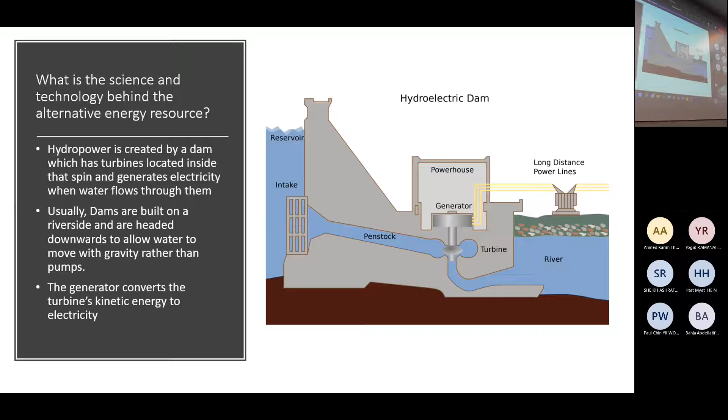Furthermore, in the dam we have a control gate to control how much water enters the penstock, which controls how much electricity is being generated. Also, if you don't already know, hydropower is a renewable energy source because it relies on the water cycle, which is driven by the sun, making it renewable. Next slide.

Types of hydropower plants. You probably thought there was only one type, the impoundment facility, which is the one I talked about earlier, the most common one. But there are 2 more: diversion, which is at the top right, and pump storage, which is here. Next slide.

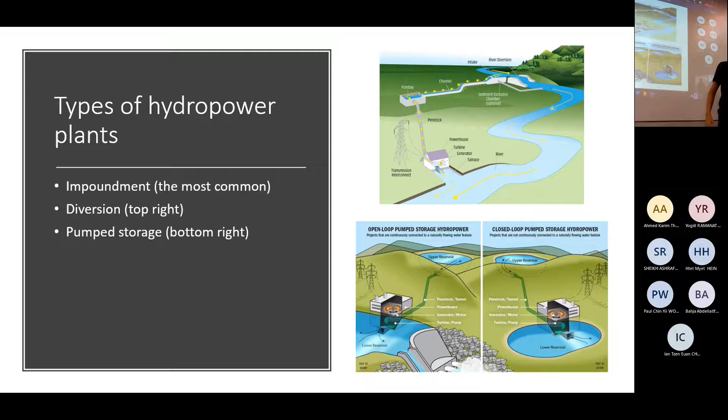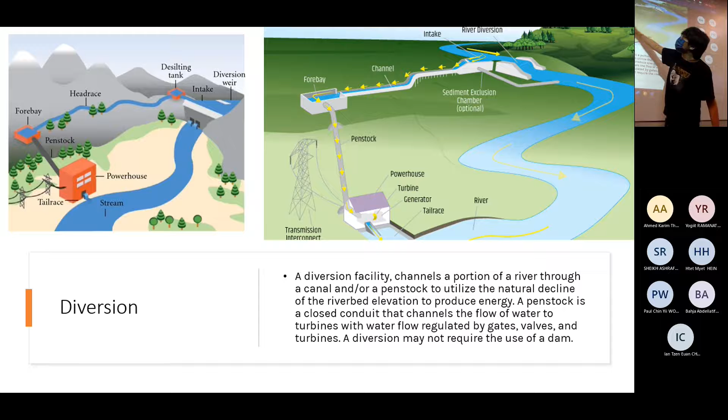So we have the diversion facility for the hydropower plant. This is basically what it looks like. The impoundment facility uses the whole river, but for diversion it only takes a portion of the river, hence the name. A diversion facility channels a portion of the river through a canal or penstock to utilize the natural decline of the riverbed elevation to produce energy. A penstock is a closed conduit that channels the flow of water to turbines, with water flow regulated by gates, valves, and turbines. A diversion may not require the use of a dam, so this one doesn't have a dam, this one has, it's optional. Next slide.

Now we have pump storage hydropower. This one is like a rechargeable battery, right? So when the electricity demand is low, meaning there's more than enough electricity for everyone in town, it pumps up the water to the upper reservoir.

So when electricity demand is high, it lets the water back down, spinning the turbine and generating electricity, so everyone gets electricity. There are two types: one where it's from the upper reservoir to the lower reservoir, and another that uses a lake or a river.

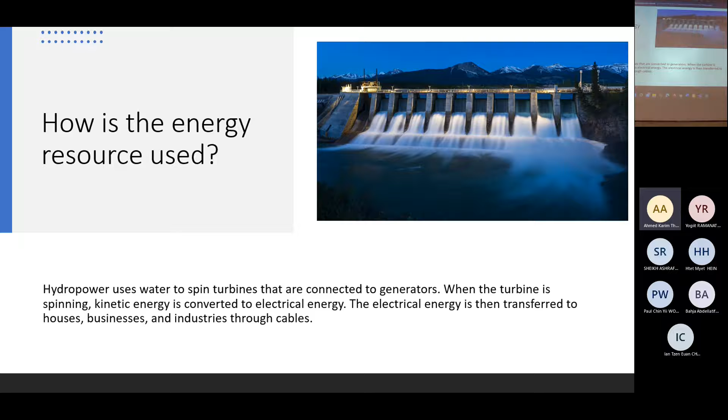Now, how is the energy resource used? The energy resource is used from an upper reservoir that passes down water to a lower reservoir, which applies motion to turbines connected to generators. These turbines create kinetic energy, which is later converted to electrical energy. This electrical energy is then transferred to houses, businesses, and industries through cables.

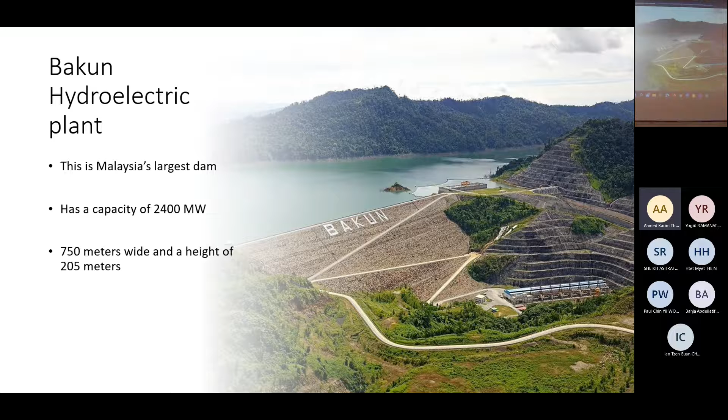In Malaysia, there are several plants, some producing between 40.5 megawatts all the way to 2,400 megawatts. The largest current hydroelectrical plant in Malaysia is Bakun Hydroelectricity Plant, located in Sarawak. It is also the largest dam in Malaysia, with a width of 750 meters and standing at a height of 205. The output of this hydroelectrical plant is 2,400 megawatts.

Now, what are the advantages and disadvantages of hydroelectrical energy? The benefits are that it generates electricity cleanly. Water can also be controlled to avoid flooding and support irrigation, and it could also be used to make clean water. However, on the downside, some people have to migrate and move to other areas. It's also very expensive, there is a limit to some reservoirs, and it is not 100% safe, as animals and fish could get injured or killed in the process.

Now, what is the future like, speaking in terms of Malaysia? Malaysia is looking to plan and build more hydroelectrical dam plants in the future. Currently in Malaysia, there are two dams in construction: the Papar Dam project in East Malaysia, and the Nenggiri Dam in Gua Musang in Western Malaysia.

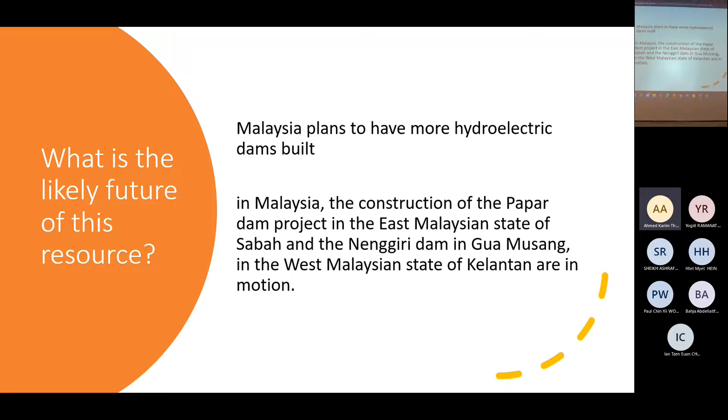What does the community think about this resource? Overall, there's a very mixed response. Some people are in favor of hydroelectrical plants, however some are not. Usually those who are in favor have the interest of electricity and job opportunities. However, those who are opposed and against hydropower plants are usually those who tend to have to move away or relocate due to the construction of a hydropower plant.

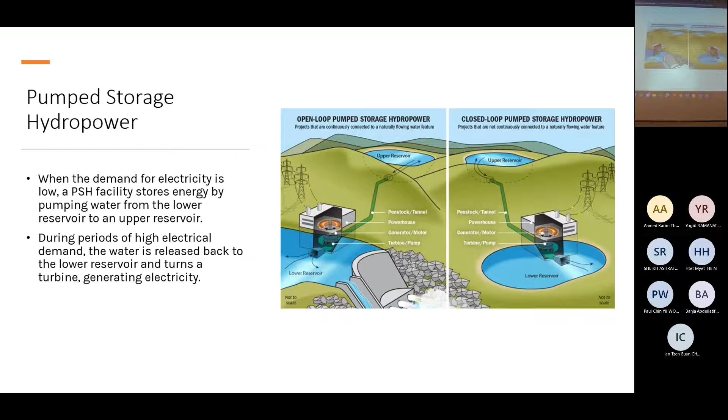Okay good, and then for your—can you go to that slide again? What Adrian was showing. Up, another one before this, I think. Yeah, here. There are two things that you are showing, one is dam, there is no other, and another was no dam. What does it mean?

No, it's just one that has no dam, one has a dam. So if there is no dam, how can you produce electricity? First of all, why do you need a dam? It doesn't need a dam. So how? Okay.

What is the science behind producing electricity from water? How do we produce electricity from water? The water spins a turbine, then the turbine generates electricity. The turbine rotates the generator, and what do you have? Can we just pour the water into the turbine?

It needs force. How do you create that force? Why does it have to be very high? It needs potential energy. That potential energy spins the turbine, creating kinetic energy, which becomes electrical energy. You need potential energy, and if you're talking about potential energy, you have to have a very big potential energy to produce a lot of electricity, right?

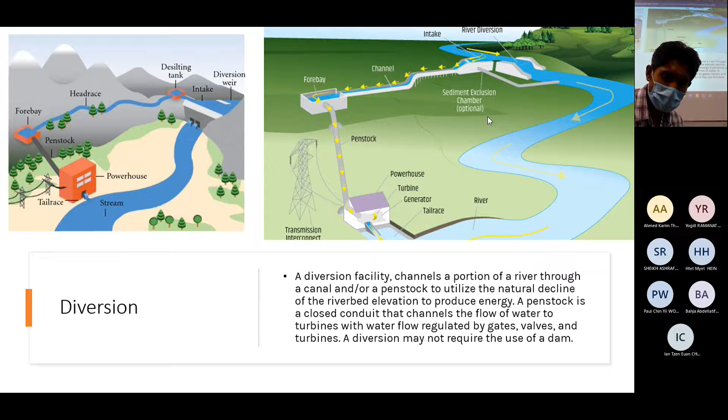Thank you, Tadian. Okay, go and sit. Ahmed, yes, you sir. So you recommended some of the things - can you go to your slide, the problem and recommendation part? Go down, scroll down please, more, more, yeah there. Yes, so benefits and problems. The benefit is generating electricity cleanly.

What do you mean by cleanly? Without causing any harmful substances. What are the harmful substances that can be considered? Harmful substances that could be considered would be dangerous gases such as nitrogen oxide that would be generated by fossil fuels in comparison. Any other gases would be considered dangerous, like methane or carbon monoxide, carbon dioxide.

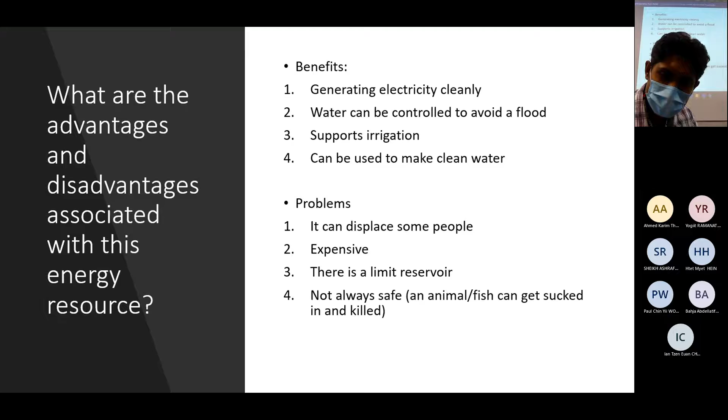Those also would be considered dangerous, sir. So this hydropower, they do not produce those types of gases, is it? Usually no, only in some situations where they use a small generator to redirect water to a different location, such as taking it back up the reservoir, then yes, it would sometimes cause some harmful substances. What is that, taking back the water up onto the dam again? There are some situations where water is retransferred from a lower reservoir to an upper reservoir to avoid flooding, and in that scenario they usually tend to use diesel generators in this process, although sometimes they do use proper electrical generators.

Do you have any example of such activities? Not in the slides, but a while back I did talk to a gentleman who built a dam in Pakistan. He talked about a small dam they're currently constructing that uses such systems to keep things in control. But did you fact check his claim?

Yes, sir. They are working with the authorities of Pakistan. The gentleman is currently retired, but he used to work with the authorities of Pakistan and is still a consultant for hydropower construction there.

How did you fact check that? Because if you want to build a hydroelectric dam, do you know how much water a typical hydropower dam contains? A very massive amount usually, but the case he spoke of is during construction, because there's a lot of water movement factors during construction.

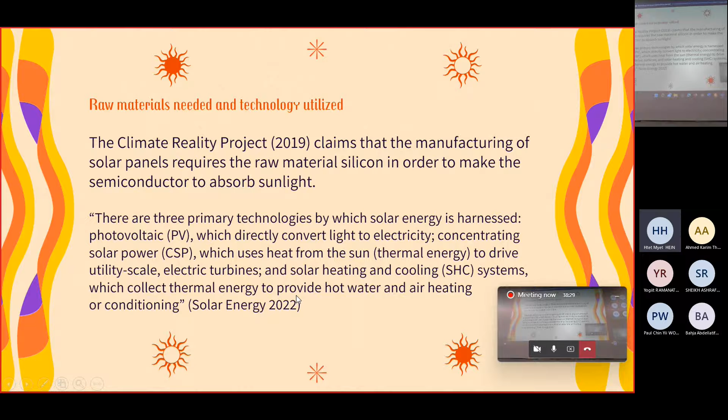PV will directly convert light into electricity. CSP will use the heat from the sun to drive utility scale electric turbines. And SHC will collect thermal energy to provide hot water, heating, and conditioning.

Energy changes occur. The solar panels have two types of semiconductors: the positive type, or P type, and the negative type, or N type. When activated, the electrons will move from the N type to the P type, then a junction is formed.

When sunlight shines on the junction, this will cause a hole due to a photon knocking the electron free. The hole is filled by more electrons, which means free electrons are collected, and they flow through the conductor, so the electrical current is formed.

So is solar energy renewable? Solar energy is in fact renewable, and the US has the most solar energy resources in the world. This is because the sun will always produce light energy.

Malaysia's solar energy profile: Malaysia and ASEAN have been hesitant to deploy solar and other renewable energy production capabilities. Renewable energy only represents 2% of Malaysia's total power producing capacity. Looking ahead, things appear to be brighter, and by 2030, Malaysia's government wants renewables to account for half the country's electricity producing capacity.

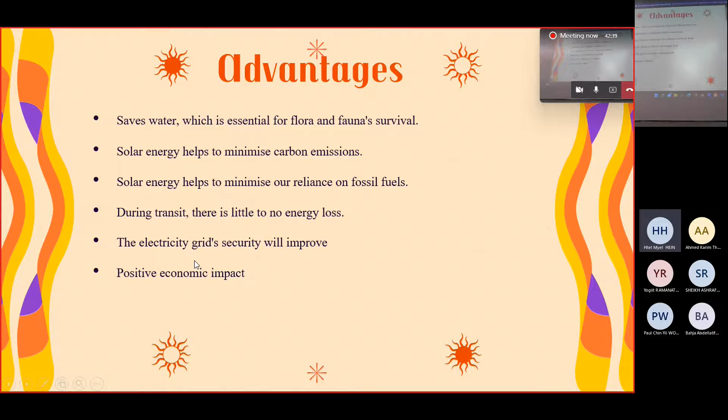The advantages of using solar power: it will save water, which is essential for both flora and fauna survival. Solar energy will help minimize our carbon emission issues. It also helps minimize our reliance on fossil fuel, which will also help us with global warming. During transit, there's little energy loss. Electricity grid security will also be improved, and it will likely have a positive economic impact.

For disadvantages, it is very dependent on sunlight. As we already covered, some countries do not have access to sunlight. There can be toxicity of some solar panels, and it requires large installation areas, and energy storage can be expensive. Finally, the lifespan of solar panels may not be very long.

Global warming and solar power. One of the most pressing issues confronting us today is global warming, and the only method to mitigate the negative consequences of both climate change and global warming is to cut carbon emissions. Solar energy is a great method to cut carbon emissions.

This is because solar power is one of very few sources that does not contribute to global warming and does not emit large amounts of carbon dioxide into the atmosphere or the environment. This is the amount of carbon dioxide emission by energy source.

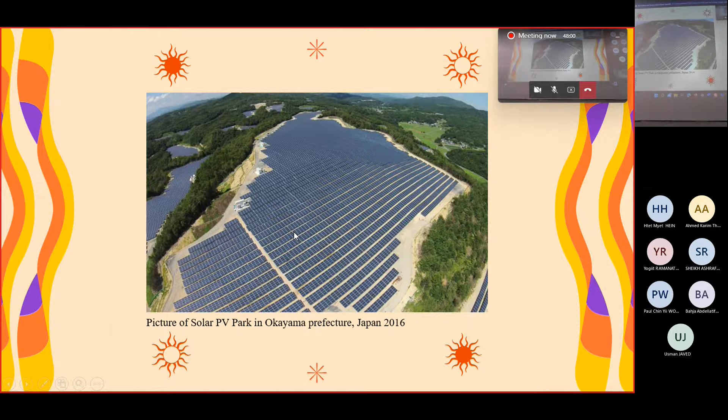Next slide. This is a picture of a solar park in Okayama Prefecture, Japan, 2016. The current largest solar park is in Bhadla, India, which spans 14,000 acres of land. Next slide.

Reasons why Malaysia can't switch to solar power immediately: it is widely known, especially by those who live in Malaysia, that our country is very hot, being close to the equator, and that we have more than enough sun. Taking advantage of this to switch to solar panel power seems obvious, right? But Malaysia's weather is not as suitable for solar energy as we would like. Solar energy works on light intensity, not heat intensity - specifically, the power from the sun that knocks electrons into a current we can harness. The weather in neighboring countries like Australia, where sunlight is reportedly blinding throughout summer, is much more efficient than the skies of Malaysia. Another issue is the financial state of our government due to... next slide.

Why solar power? Solar power is likely to be the main renewable energy that sustains power for mankind's foreseeable future, for many reasons, one of which is that the sun shall continue to radiate solar energy for the next many millions of years. Solar energy doesn't produce any air pollutants, which could lead to global warming.

We can... next slide. Thank you for your attention.

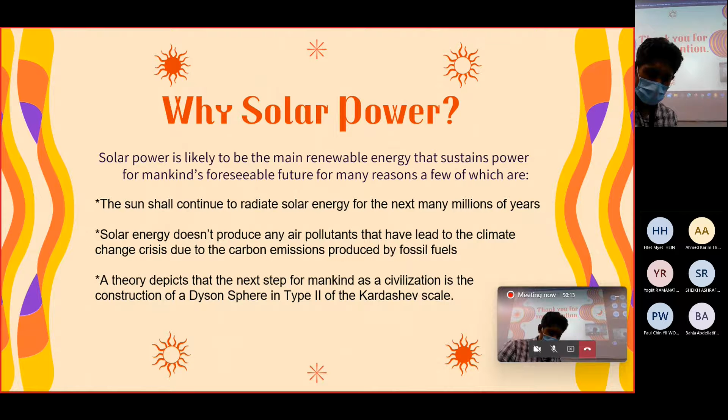Myet, can you scroll up to the slide with advantages and disadvantages? You said here the electricity grid security will improve, there's positive economic impact, and solar helps minimize our reliance on fossil fuel. Yeah, we understand. Saves water - the first one, saves water, which is essential for flora and fauna's survival. How and why?

Can you hear? Hello, Htet Myet Hein? Hello, can you hear? Yes, sir. So what does it mean - saves flora and fauna by saving the water?

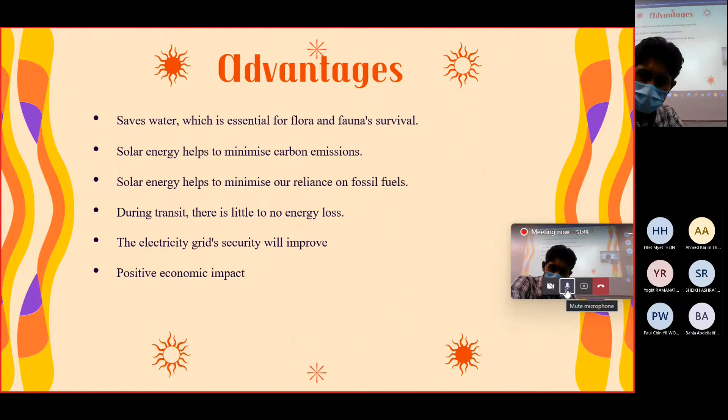I didn't do this. How does it improve grid security? Can you go to the next slide? Depends on sunlight, toxicity of solar panels. What does it mean, toxicity of solar panels, expensive energy storage? What does it mean? I didn't do this part of the slide. You didn't do this part? Yes, sir. Okay, then go.

It's Bahja. Okay, then scroll up please. Go up, scroll up. Yeah, there are two types, positive type and negative type. What are these positive type, negative type? They are semiconductors. Okay, so why is it related here? How is it related here? P type, N type.

Okay, so general question is, did you show any area in Malaysia or Sarawak that would be beneficial from the solar panel? In Malaysia, which area would benefit from using solar panels? It's too cold, then can you turn on... So can you say that again? In which area in Malaysia would you install this system, and why? I will say maybe the rural areas, considering that they usually don't have the energy supplies that we do, and rural areas already have been dependent on sunlight. So I'll say rural areas.

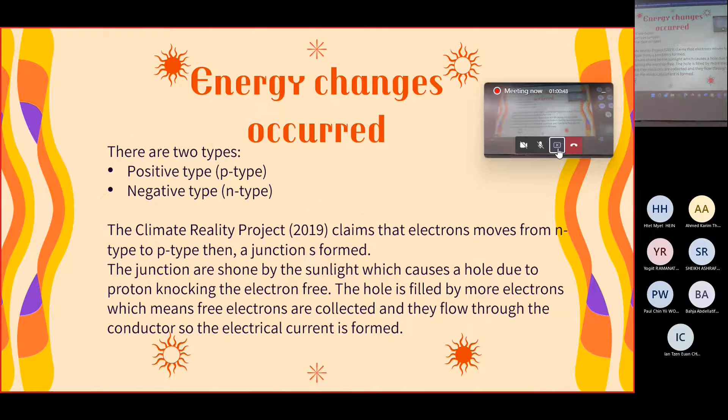What is that, biogas, is it? Sir, it's me, Bahja. What is that? I'm Bahja, sir. Yeah, so where did you go? My mic just stopped, I really apologize. But if I can't redo my part, I can answer the questions. No, not now, but I think I will ask you to present your part later on - I will find a time for that. Okay, no problem, thank you.

Okay, so biomass - yes, continue please.

Are you waiting for Francis? You went to the toilet. Who will go first, you or Francis? You can go first, no problem. Let him come.

Yeah, it's fine, so we go.

How about you share the space first? You share the space, please.

Okay, so biomass. So I start, biomass is going down. After that, there are two, nuclear and wind.

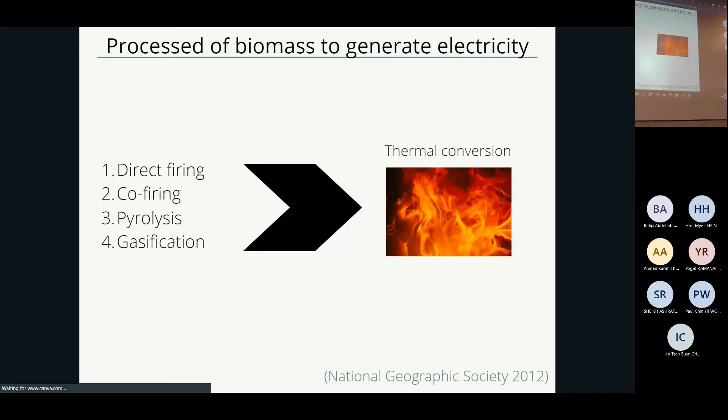Okay. Was it so laggy? Sorry, okay, all right, okay.

So before direct firing and co-firing, there's a chemical process called torrefaction that needs to be carried out, where the biomass is heated to a temperature of 200 to 300 degrees Celsius, turning the biomass into a dry, blackened material.

That material is then compressed into briquettes. As you can see from the image here, this black material is the biomass briquettes, which contain high energy density and are easily burned during direct firing and co-firing.

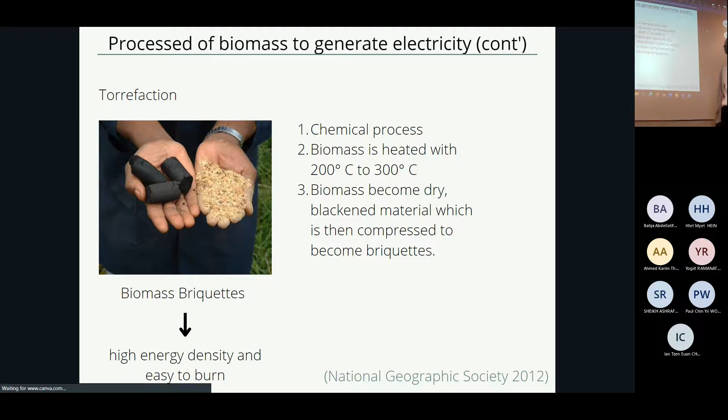In direct firing, we skip this process, and the biomass briquettes are burned in this furnace. The heat produced is absorbed by the boiler on top, which turns the water into steam. The steam is transported to the turbine to turn the turbine in order to generate electricity.

For co-firing, it will be almost the same as direct firing during the electricity generation part. However, the only difference is that both biomass and fossil fuels are burned together, as the biomass only acts as a substitution for a portion of fossil fuels.

As for pyrolysis, this is a process to turn biomass into liquid fuel. During pyrolysis, the biomass is burned at a temperature of 500 degrees Celsius or above.

This turns biomass into pyrolysis oil or biofuel, which can be used as a substitution for fossil fuels or diesel for electricity generation.

Gasification is the process to turn biomass into gas fuel. In gasification, there are 3 important steps. Firstly, gasification itself, which turns biomass into gas, and second, gas purification, which removes impurities such as ash and tar from the gas.

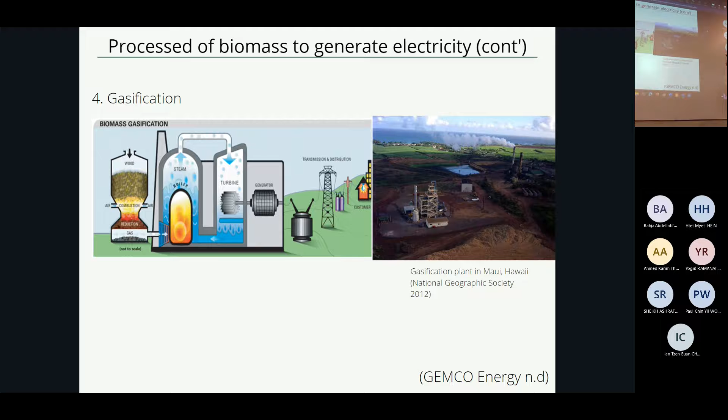Lastly, gas power generation, where the gas fuel is burned to produce heat and turn water into steam, which turns the steam turbine to generate electricity.

All right, no need, this one skip.

So the overall energy transformation would be first chemical energy, which is in the biomass, burned to produce heat energy. The heat energy turns water into steam, and the steam turns the steam turbine, which is considered kinetic energy, and then electricity is produced, which is considered electrical energy.

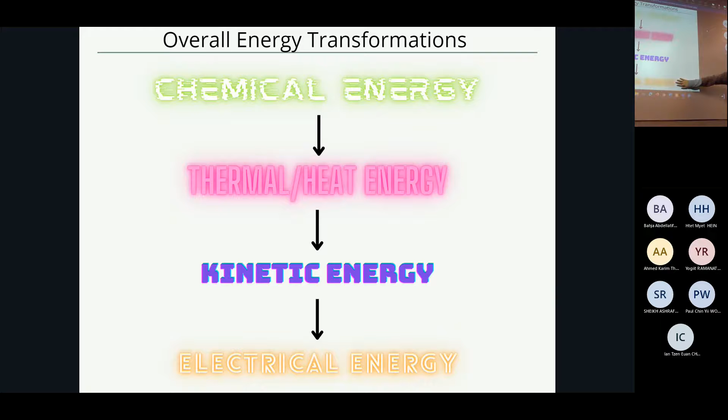Is biomass a renewable or non-renewable energy? Biomass can actually be both renewable or non-renewable, depending on the situation. When the quantity of biomass available is greater than the usage of biomass, it is considered a renewable energy source. However, vice versa.

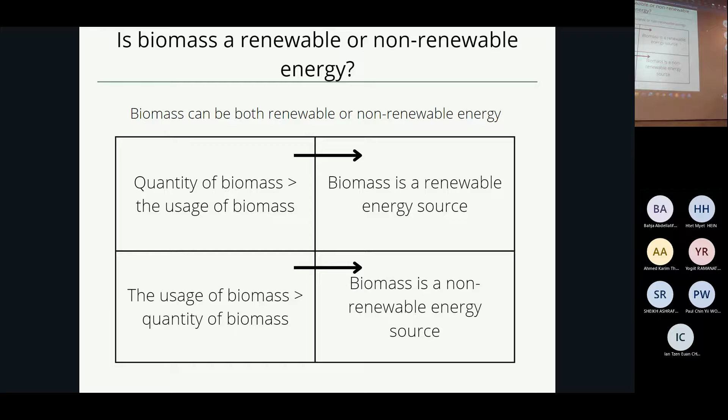All right, that's all of my presentation, and the next one will be Shu.

Hello everyone, so we'll run through the usage within Malaysia. In Malaysia, we have a large resource of biomass as well as wood waste, but this resource hasn't yet been exploited to full capacity.

In 2017, it was reported that Malaysia produced about 702 kilotons of biodiesel. Malaysia is also ranked the 2nd largest producer of palm oil, and palm oil could also be used to produce biomass as an energy source.

According to Erickson, in Zambia, about 70% of the population uses biomass for heating and cooking in households, and because of that, there's a rise in deforestation.

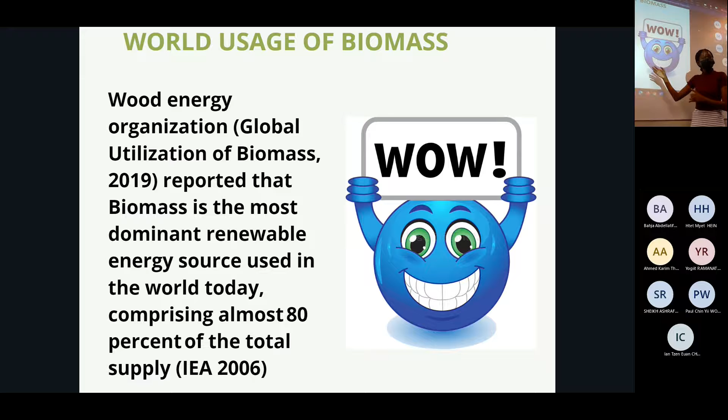So in the world, most usage of biomass is by African countries, with the exception of Haiti, Nepal, Myanmar, and Cambodia. But most of the countries that use this biomass on a day-to-day basis are African countries, with the highest being Ethiopia. In most of these countries, rural areas recorded a higher usage of this biomass in the form of wood.

In Sudan, Haiti, and Nepal, it's also used on a small scale in industries such as sawmills, sugar mills, and tobacco curing.

So some of the reasons why some countries are not using this resource are financial reasons, because they need technology as well as large land for preparation of this biomass, as well as storage and transportation of the biomass.

Environmental laws and regulations that are not favorable to the use of biomass as a renewable resource, and also fines and penalties that are lenient towards the use of fossil fuels.

Belief of politicians or key decision makers that fossil fuels are still a resource that we need to use in the world, and they have not seen the benefits of biomass as a renewable resource of energy.

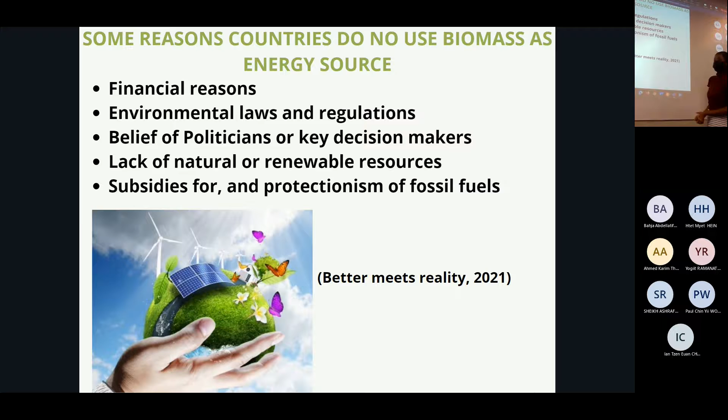Thank you, Shruti. Today I'll be presenting about the benefits and drawbacks of using biomass.

Did you know that biomass energy is actually cleaner than using fossil fuel? This is a point I'll explain later, and because of that it releases less greenhouse gases, also known as GHG, than fossil fuel. Biomass is also cheaper in price than fossil fuel.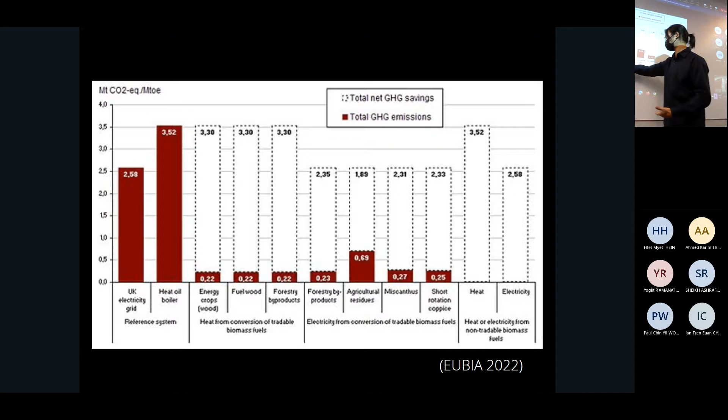This shows the quantity of CO2 gained by burning it, which will mostly be fossil fuel here. This will be gained from biomass, which is done by heat sources, and this would be gained for electricity. This is a comparison.

It's found that if we use biomass, we actually save a total of 3.3 million tons of GHG emissions when converting biomass to heat energy, and an average of 2.5 million tons for electricity generated from biomass.

Another thing about biomass is that it's actually carbon neutral, meaning the carbon dioxide released by biomass is at the same rate as the consumption of carbon dioxide by the plants. Therefore, biomass has the potential to contribute fewer emissions of greenhouse gases to the earth, and therefore doesn't raise temperature as much as fossil fuels.

But even though biomass has a lot of benefits, we also need to consider the health and safety issues with biomass. One thing about biomass is that it produces a lot of methane gas. High exposure to it causes mood swings, trouble speaking, headaches, vomiting, memory loss, and blurred vision.

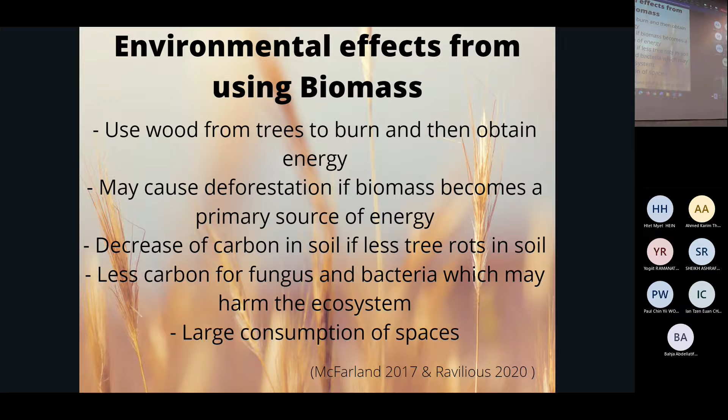It's also important to consider the environmental impact, as biomass actually affects nature through deforestation. Large consumption of wood, which is a major source of biomass, needs to be diversified, and also carbon inside the soil is affected. As much as carbon neutral is a thing, this means carbon dioxide in the air will still be sustained, but not in the soil. Therefore, some species such as fungus and bacteria may go extinct and will eventually harm the ecosystem. Another thing is that it consumes a lot of space for plants, as a foundation for biomass-specific plants.

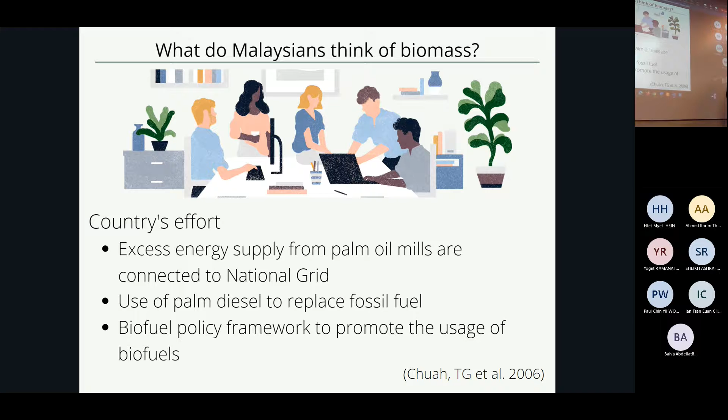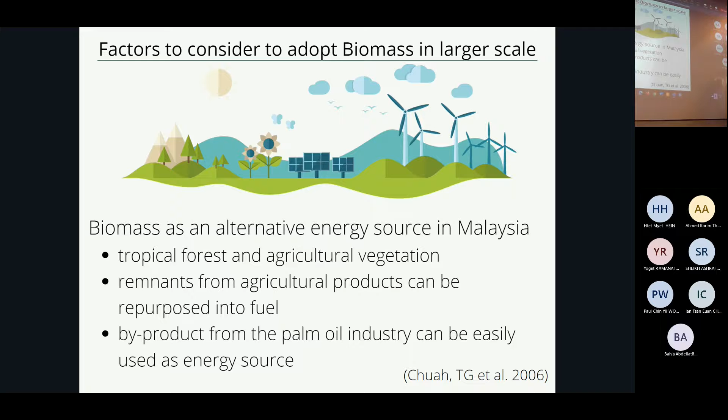Secondly, what are the factors to consider if we were to adopt biomass on a large scale? As Malaysia is still mostly surrounded by tropical rainforest and agricultural vegetation, biomass has the most potential as an alternative energy source in Malaysia. As mentioned before, remnants from agricultural products can be repurposed into fuels. Byproducts from the palm oil industry can be easily used as a renewable energy source. Next, to provide an entire country with consistent power supply, large-scale biomass energy production will be needed. As financial resources are required to develop various projects, many investors are reluctant to invest in bioenergy projects as it is considered an infant industry with a high risk factor.

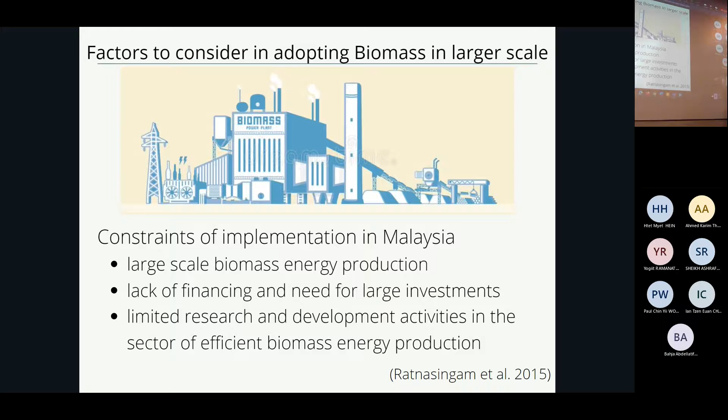Thirdly, let's discuss the factors hindering the implementation of biomass in Malaysia. One of the main things to include is that biomass is not a clean source of energy. As burning of biogas creates air pollution, it can cause asthma, cancer, heart attacks, or even premature deaths to surrounding residents of the area. This is because pollution from burning wood is just as bad as pollution from burning coal. Next, due to the lack of technical courses offered in Malaysia, there is a limitation.

Thank you, it's a good presentation, very energetic. I like this way. I'm so sorry, just- I'm so sorry for that. Do you want to give him a chance to finish his slide? Already a lot of information you have given, because I have another two groups to go, but I have some questions actually.

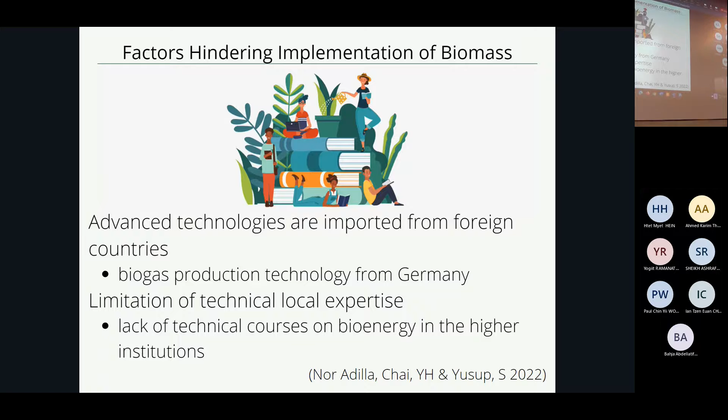As Francis concluded, it's not a clean energy, but although it's not a clean energy, we still can consider it a renewable energy, is it?

Eugene, I think you're talking about the- whatever, sorry, what is that? It's okay, that's why I said that. You tell me, I mean correct me if- no it's okay, mispronounced your name because- yeah. Eugene. Yeah, okay, Eugene, okay.

So why did you say it's not a renewable energy? I did not say it's not a renewable energy. I said it can be both renewable or non-renewable, depending on two situations: one, the quantity of biomass available, and two, the usage of biomass. So when the quantity of biomass available is greater than the usage of biomass, then it can be considered a renewable energy source. But if the quantity of biomass available is lesser than the usage of biomass, then it will be considered a non-renewable energy source.

So it's just your criteria of renewable, non-renewable based on the usage. Yeah, based on the usage and the quantity available. It's like solar energy. So if I have something, biomass, yeah.

Mostly, okay, before that, where do you get the biomass from? Naturally, plants, non-living plants, yeah, underneath the water, soil, right? Underneath- just burn the plants. Sorry, we burn the plants, to burn the plants, yeah, the raw material. The raw material is, usually biomass, we find it from underneath the soil, underground. How do you find the coal? How do you find the coal?

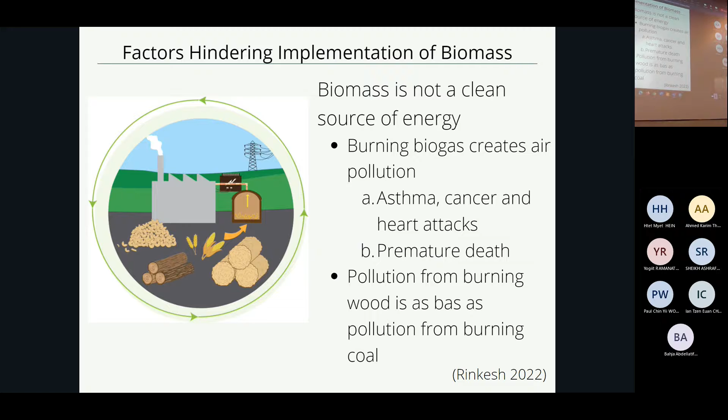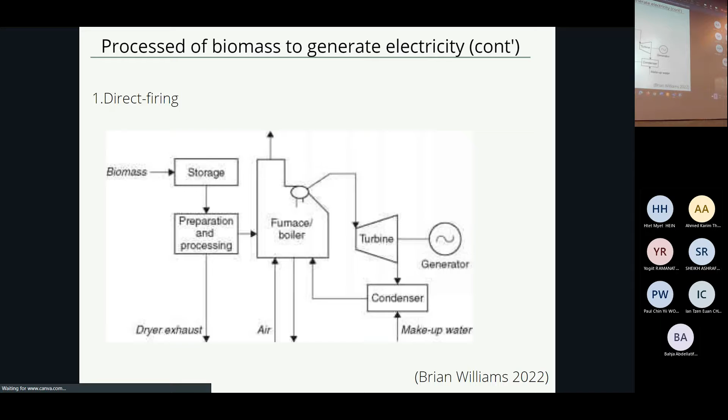Oh, go to this slide. I remember, go to the slide. Go up. Yeah, here, go down. Down, yeah, this one, co-firing. No, coal-fired, pyrolysis or co-firing? So this is the boiler, yeah?

Yeah, your biomass acts as a substitute to a portion of fossil fuel. So we can substitute fossil fuel, but only a portion. Both biomass and fossil fuel, we are getting from the mines, underground. Yeah, one is renewable, another is non-renewable.

I would say coal is not renewable because coal needs a long time to make, like thousands, maybe millions of years. So if we imagine that coal could be replenished in like 2 or 3 minutes, then would you consider coal as non-renewable? It would be renewable in that way, right? That's why I'm saying that.

You're correct, that's why we consider biomass as renewable, because of torrefaction and pyrolysis, we know this technique so we can produce it that way. In that way we can consider it renewable. But if you are just taking it from underneath the ground, it's not renewable, you cannot replenish it that fast.

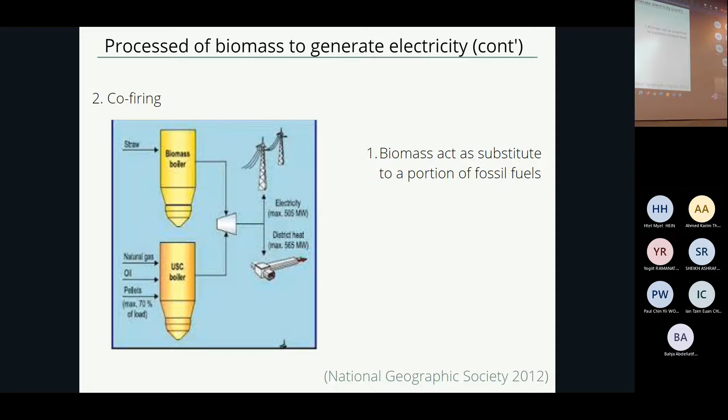That's the good thing. Okay, my question to Ian. You talk about biomass, this and that, good, bad. What is the energy density of biomass? Have you done the research? From 1 kg of biomass, how much energy can you get?

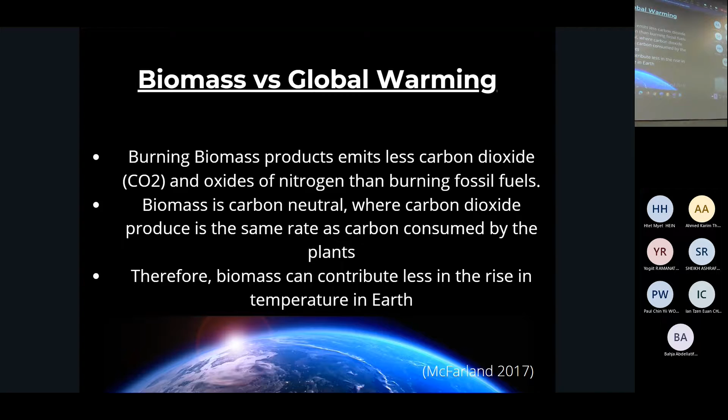Sorry, I did not find the amount of energy. Do you think it is constant? I think it can vary depending on what biomass. Exactly, yes, what biomass, how long, how much stability it has, and how long do you store it, oxidation, many things going on. I didn't ask for that much detail, but I'm putting these questions forward so that later, if you are interested, you can think more about these things.

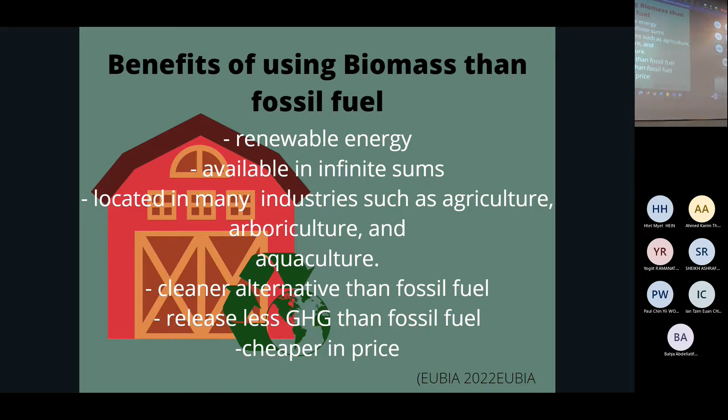Okay, and Francis, you're talking about biomass in Malaysia. How much do you know? Do we know how much biomass we can extract naturally, or currently what is the practice? Currently there isn't much practice because I think...

Can you repeat the question again? What is the current amount of Malaysian usage of biomass? Does Malaysia really use biomass? I believe I read one article, but I didn't cite it here. It says that there are only a few places, it's not majorly dependent on biomass because they are very reluctant to switch from our current energy source to biomass.

Okay, so that means there is almost none, a few, but it's close to none because it's not majorly dependent on biomass to supply energy to our country. Okay.

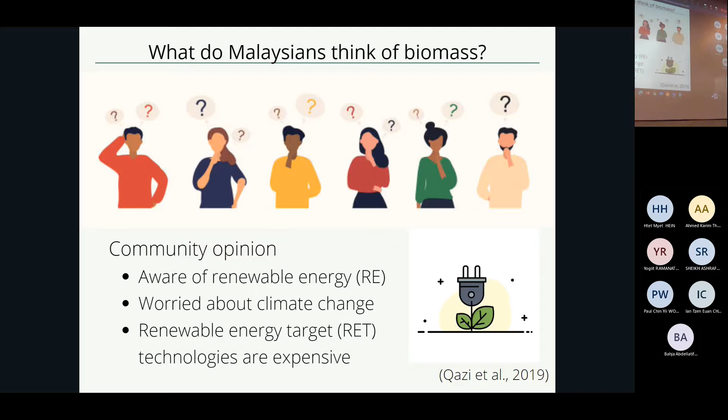You are talking about biomass all over Africa and everywhere. How does this biomass actually help to produce electricity? Our concern was to produce renewable electricity, right? So how does this biomass help to produce it? In most of these countries, we use electricity, but it's used elsewhere.

Okay, in most cases, basically heated in the form of charcoal, that black coal. The black coal is normally heated and used, just as we see in fireplaces. So we get the heat energy from there. Yes, so this heat energy will be converted to electricity.

To electricity to just be used, the heat will be used itself? To use for what? The heat itself will be the one used? And that's it completely? No, no. You are using this biomass in a factory, right? But you need that heat energy at your home. Are you bringing the factory to your home, or bringing the home to your factory? So it's distributed. How?

So once you have the electricity produced... Exactly, that's my point, how do you produce electricity then? So he explained the process in which it was heated. What heated? The plants and biomass. Okay, and then? Yes, they're heated and then converted into thermal energy, and that thermal energy is spilled to turbines. The turbines are connected to grids, which are then distributed.

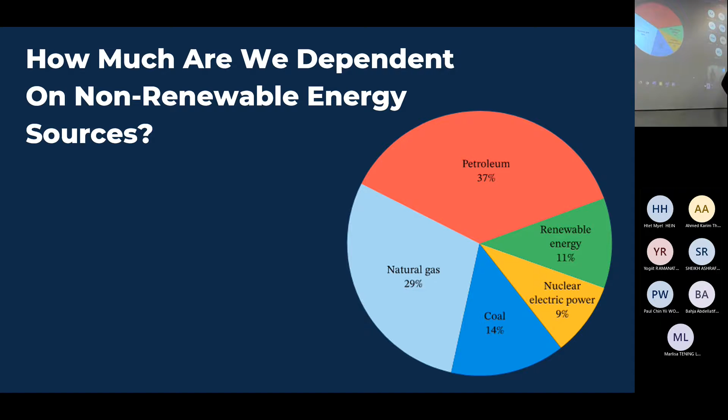Moving to the introduction part, wind is known as the cleanest renewable energy resource ever. So how is this converted to electric energy? We'll discuss that later, but starting with formation: wind currents form due to different atmospheric pressures, flowing from higher to lower pressure areas. These air currents turn the windmills, the propellers rotate, and this generates electricity. But this is not as simple as it seems.

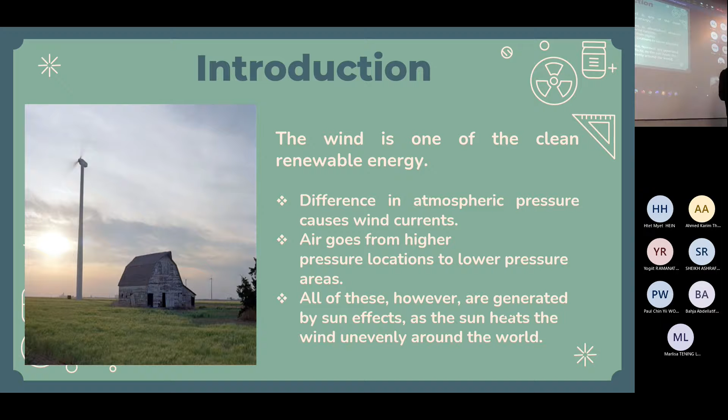This kinetic energy then converts to mechanical energy and then into electrical energy. So we have a transformation of energy from kinetic to mechanical and then to electrical. The sun plays an important role in this - we won't focus on the sun's effects, but we must mention it because it spreads wind currents throughout the earth unevenly. Can we move to the next slide?

Okay, wind energy, this is basically the mechanism. Wind power or wind energy is described as the process by which wind energy is used to generate mechanical power or electricity, as I have told you before. Wind turbines convert kinetic into mechanical and then into electrical energy. We'll discuss the mechanism.

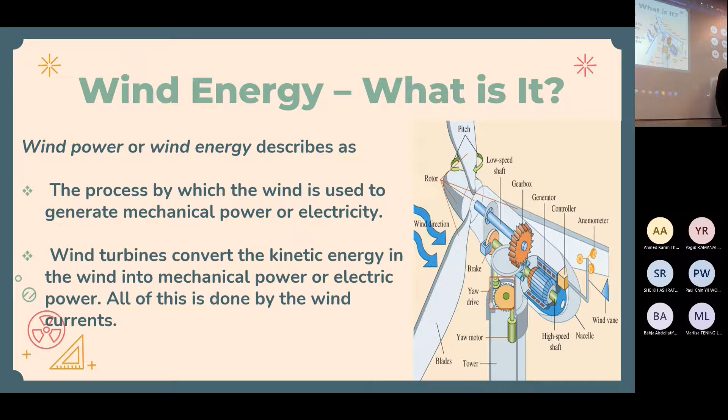Now we'll talk about the conversion of wind power into electric power. We can see that wind turns the propeller as the wind strikes the propellers. The propellers rotate, and as they rotate, the generator fixed inside the windmill generates mechanical power, which is then converted into electricity, the cleanest and safest electricity we can imagine.

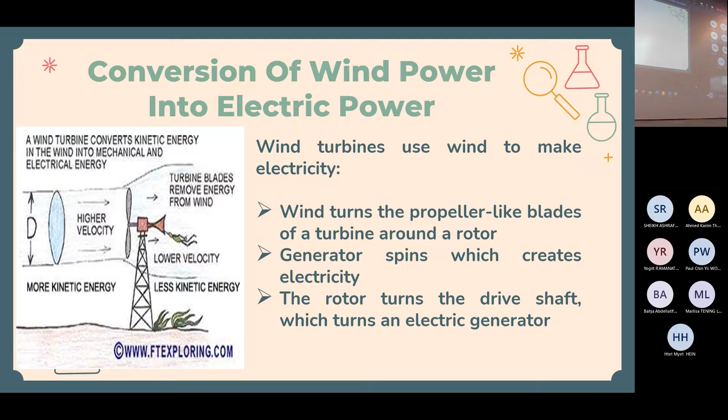Thanks. So greetings, everyone. My name's Sheikh Ashraf Raj. First, I would like to thank Osman for introducing us to the topic of wind power and further explaining the conversion of wind power into electric power. And now that we have an idea about the topic, I would like to focus on the application of the whole process of gathering electricity from wind power and how all of us can use it.

Can you move to the previous slide, please? Right when I say to move, all right. May I have the next slide, please? Click it one more time. So, yes, you have heard that, right? Do you hear the sound of the cash? Oh, maybe there's a problem with the slides.

Anyways, hope you don't mind the animation, but my apologies to the others who didn't like it. The aim of using that sound you didn't hear was to let you know that the question on the screen is worth $1 million. I'm saying this because if you know how to get access to electricity generated from wind power, you may end up saving more or less than $1 million, as this process is much cheaper than the expensive ways we normally get access to electricity. So before I answer this question, I would like each of you to pay me $1 million. Like nothing's for free, you know? Sorry for that, hope you get the joke. You don't have to pay me anything, I just wanted to catch some laughter, that's all.

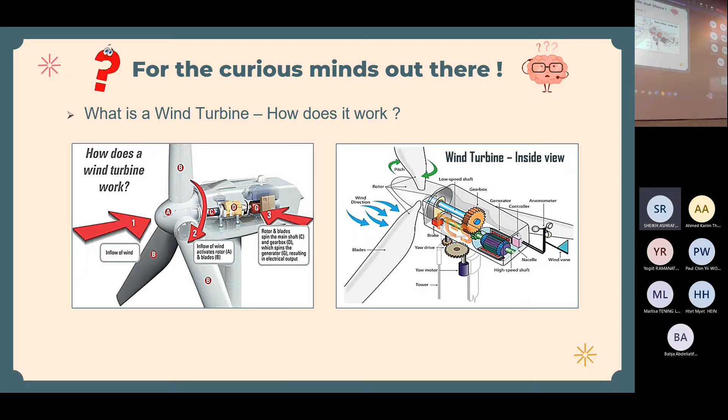Thank you. By now, most of you may be having questions about the term turbine, as you keep hearing it from me and from viewing the slides. You keep wondering, what is a turbine? What type of power does a turbine possess? Some of you, those who are very curious, may be wondering, is this turbine some sort of witchcraft or something? So I would like to tell you that I have all the answers to your assumptions, so please bear with me. I will make sure to make it as easy as possible. So I'm going to break it down and show you a video that will explain it all. Okay, can I have the next slide, please?

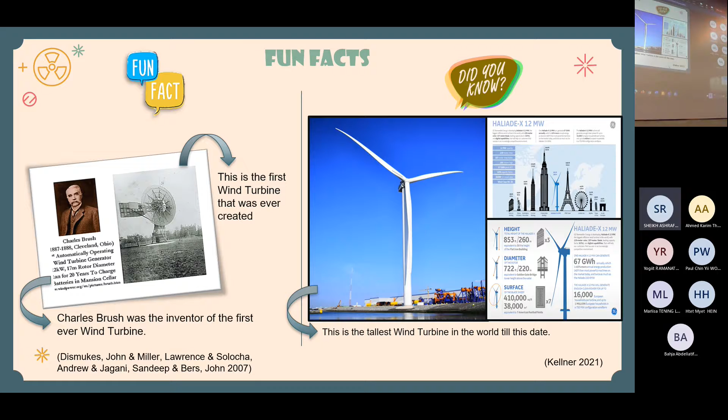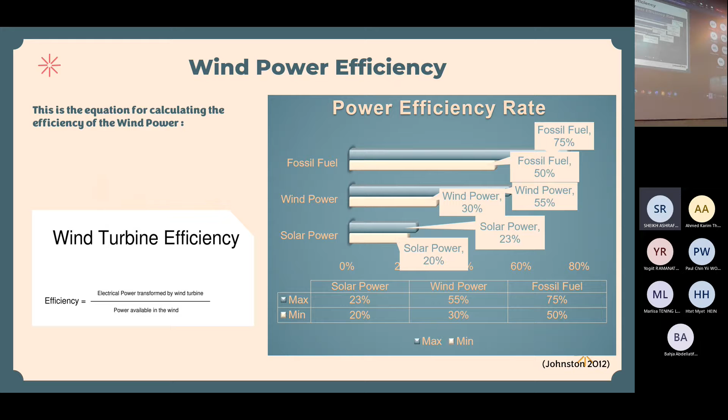Hi, thank you. Think about the advantages of wind energy. Wind energy is a clean source of energy as it is one of the most environmentally friendly ways to generate electricity. It does not produce hazardous pollution or greenhouse gas emissions such as nitrogen oxide and sulfur dioxide. It also reduces the amount of electricity generation from fossil fuels, which results in lower total air pollution and carbon dioxide emissions.

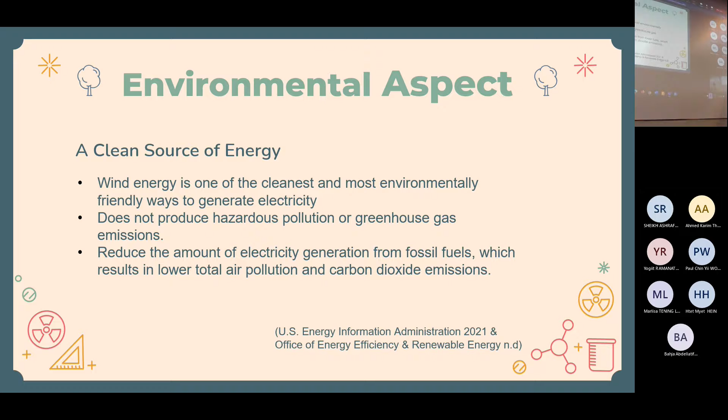Wind energy is also free from fuel, meaning it does not run on fuel at all. Once it is completed, it does not have to be connected to any kind of power source in order to generate electricity. It only runs from wind generated power. This lowers the overall cost of maintaining large-scale wind farms.

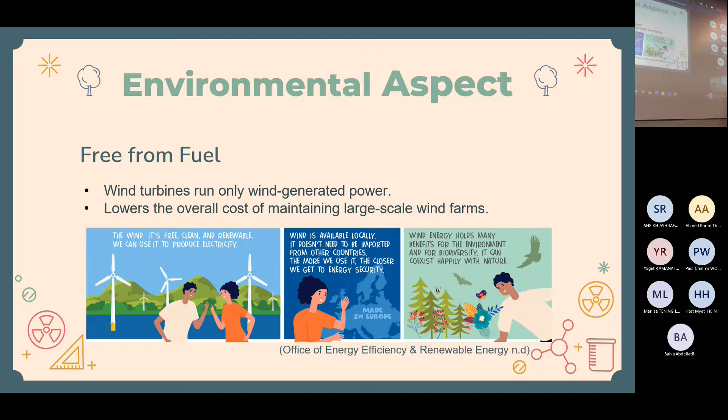I'll be talking about the challenges of using wind energy in Malaysia. First of all, Malaysia is unfavorable for harnessing wind power as it is situated in a region with low wind speed. Malaysia has an average annual wind speed of less than 2 meters per second, while a minimum speed of 4 meters per second is required for wind turbines to generate electricity.

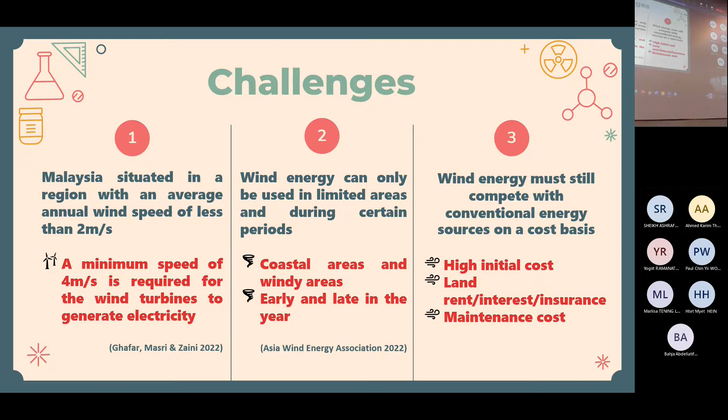Secondly, as wind speed varies with location and time, wind energy can only be used in limited areas and during certain periods, for instance in coastal or windy areas and during early and late year. Thirdly, wind energy must still compete with conventional energy sources on a cost basis. The initial construction of wind turbines is costly, including fixed costs such as land rent, interest, and insurance. Another high risk is when regular maintenance is required.

Similarly, wind energy development might not be the most profitable use of the land. The land suitable for wind turbine installation must compete with alternative uses for the land, which might be more highly valued than electricity generation. Also, wind turbines can cause noise and aesthetic pollution.

A wind generator makes a low swooshing sound every hour each day, so it will be very noisy operating. Also, some may find a large expanse of land with wind turbines unsightly and boring.

In addition, the lack of strong political will has resulted in a lack of government incentive to promote wind energy. Malaysia has a huge political bias toward fossil fuels, and the government is more willing to subsidize private independent fossil fuel power generation companies than renewable energy development. This results in the lack of a robust regulatory framework.

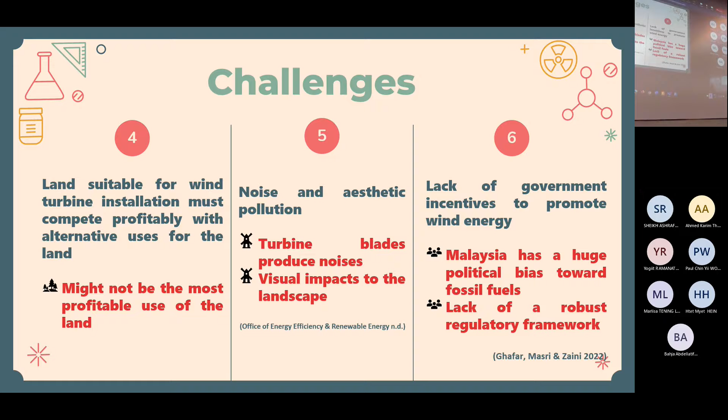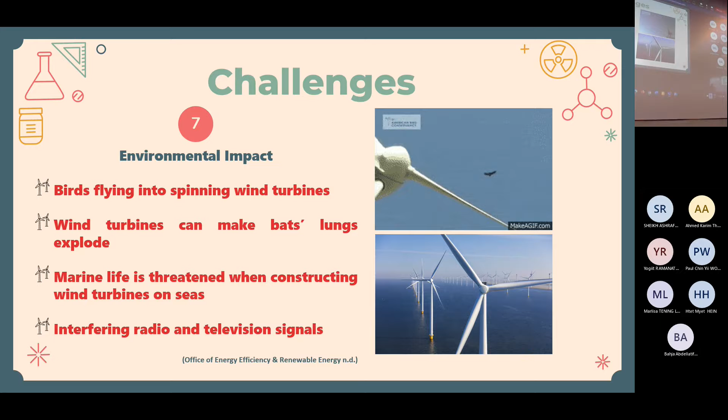And lastly, it is worth mentioning the environmental impact of wind energy. Birds can be killed if they fly into spinning wind turbines, and wind turbines can also harm bats. Similarly, when wind turbines are constructed on the seas, marine life and the ecosystem in surrounding water will be destroyed and threatened during and after construction. It will also interfere with radio and television signals.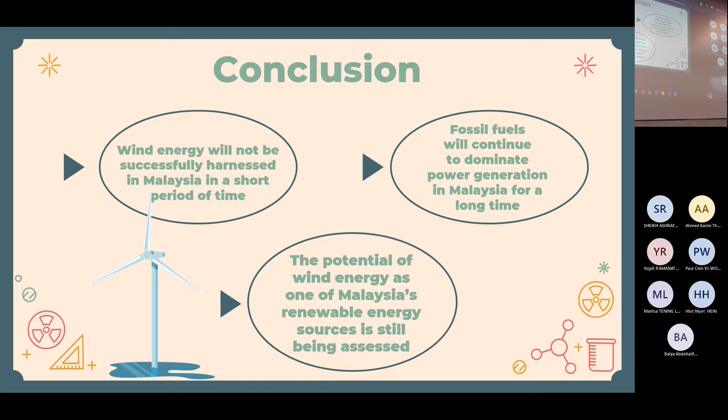To conclude, wind energy will not be successfully harnessed in Malaysia in a short period of time, provided that the technology is immature and there's continued political interference and lack of strong support for civil coordination. All right, thank you, thank you.

Yes, time's up. All right, so thank you for the presentation. My first question to you all, you did not optimize your presentation before you came here? You did not try? No trial?

We try, but like, so can I say something? Yeah, please. Yeah, the thing is that it works well when you do the slides on the app, but when you put it on MS Teams, it all messes up. I don't know why.

I don't understand. Like if you turn on our file with the app, like the Microsoft PowerPoint app, it works well. The slideshow works well. But when you turn it on with MS Teams, like right now, it doesn't work well, it messes things up. I don't know the reason.

I mean, MS Teams is just showing what you are sharing. MS Teams is not doing anything by itself. Yeah, but it was working. It's not working the same way we saw it working. Optimize the thing through MS Teams.

Yeah, how did you? No, sir. Yeah, how did you do it? We did it on the app.

How did you do the trial then? If you did not try altogether, everyone together? We probably did it individually with our own app, so we didn't do it on MS Teams the first time.

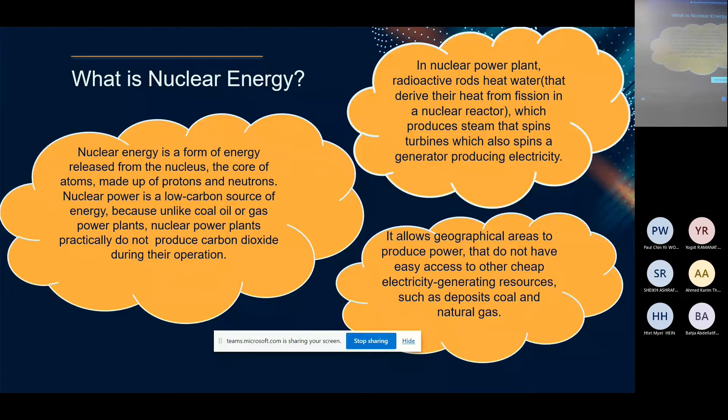Okay, sir. Next, we talk about the nuclear fuel called uranium. It can generate heat to power a turbine. Ceramic pellets are made from uranium fuel, and these ceramic pellets are pressed into a metal fuel rod.

After that is nuclear fusion. Nuclear fusion is when two or more nuclei collide together at high speed and form a new nucleus. For example, two hydrogen nuclei fused together will form the nucleus of a helium atom. This happens in stars.

Next, we talk about nuclear fission. Nuclear fission is the splitting of a big atomic nucleus into smaller nuclei. A neutron is absorbed into a nucleus in a nuclear reactor.

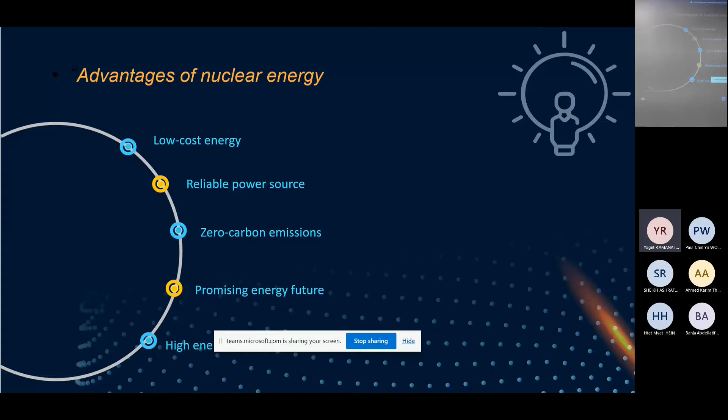We have a promising energy future. Nuclear energy currently decreases annual emissions by 500 million metric tons. And we have high energy density—the amount of fuel used by nuclear power plants is significantly less than other power plants.

The impacts of nuclear energy on the environment: nuclear power plants create a lot of positive impacts. It has low carbon emissions, reduces the exploitation of fossil fuels, and is more efficient than other forms of renewable energy.

The negative impacts are radioactive waste. Even low-level radioactive waste takes hundreds of years to achieve adequate levels of safety. It also uses high water consumption—nuclear reactors use about 1,000 liters of water, if not even more, drawn from sources like wells, rivers, and ocean bodies.

The water used to create steam and power the turbine is eventually pumped back into the body of water where it originated, but at a higher temperature, which can cause potential risk to aquatic life. As for carbon emissions, nuclear power stations emit no greenhouse gases during operation, and over their lifetime they emit roughly the same amount of carbon emissions as wind, and one-third of the emissions of electricity produced by solar. Sorry about that.

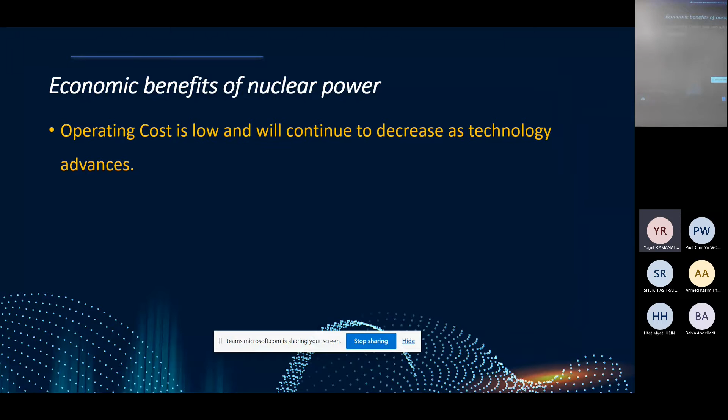Economic benefits of nuclear power. Its operating cost is low and will continue to decrease as technology advances. Nuclear power facilities are costly to construct, but they're relatively inexpensive to operate.

The expenses of waste disposal and decommissioning are typically included in the operational cost. According to research conducted by the Nuclear Energy Institute, the nuclear power sector has lowered its producing cost by 19% since their peak in 2012. And generating nuclear power will decrease the dependence on foreign oil.

Today's global energy supply system is not sustainable, given the predicted energy demands. Countries like France, Sweden, Canada, and South Korea are among the nations that have witnessed the fastest reduction in carbon intensity and clean energy transition through their nuclear reactors.

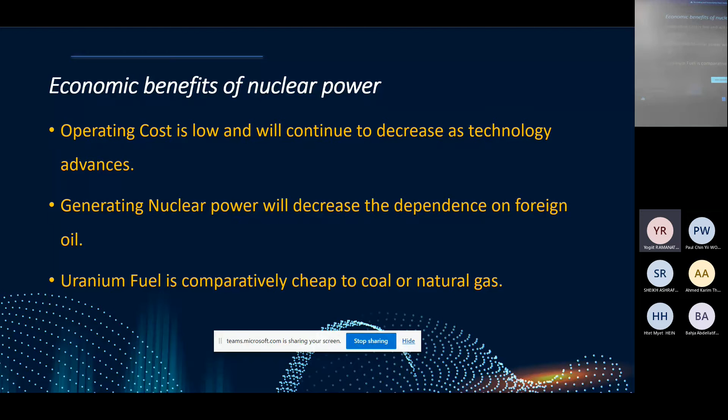Uranium fuel is comparatively cheap to coal or natural gas. Uranium has the benefit of being a highly concentrated energy source. The amounts required are far fewer than those required for coal or oil. A kilogram of natural uranium produces 20,000 times the amount of energy as a kilogram of coal.

The social aspect of nuclear energy: nuclear power facilities provide long-term employment and a high need for specialized personnel compared to other forms of energy. According to the Nuclear Energy Institute, a nuclear power plant creates 400 to 700 permanent jobs and also thousands of jobs during its construction.

Nuclear power plants have some of the least detrimental effects on human health when compared to other energy sources. They significantly enhance air quality and minimize pollution. According to NASA and Columbia University, nuclear energy may have saved 1.8 million lives that were being lost to pollution from other energy sources.

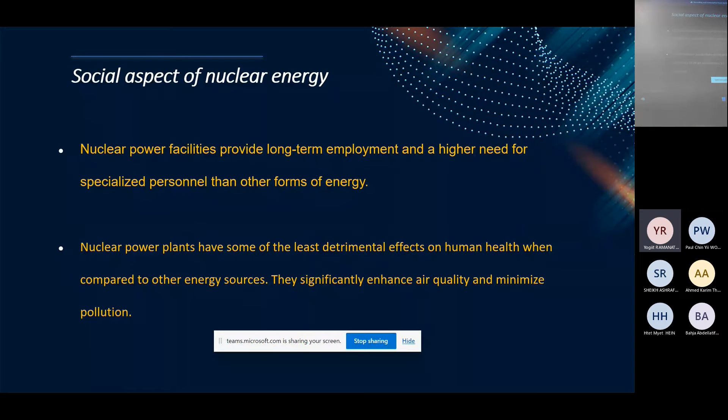Coal and natural gas power plants discharge carbon dioxide into the air, which causes a number of environmental issues. And now the disadvantages of nuclear energy.

It costs a lot to build. Nuclear power facilities cost billions of dollars to construct and take significantly longer than any other renewable or non-renewable energy infrastructure — often more than a decade.

It can be weaponized, as nuclear energy is an immense power. Today, nuclear energy can be used to make weapons, and if these nuclear power plants get into the wrong hands, it can be catastrophic.

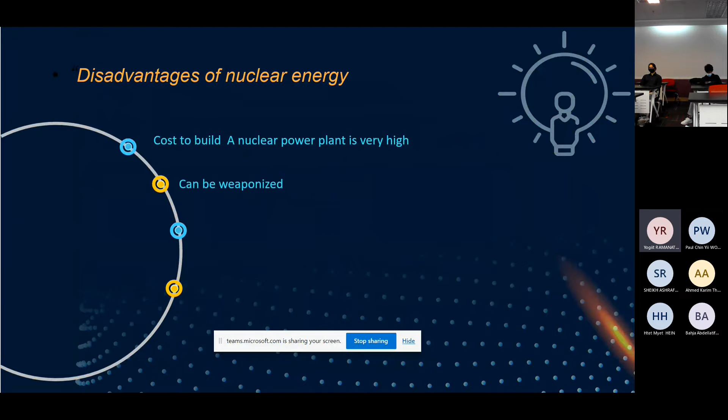The availability of uranium: as we all know, uranium is a very scarce resource that only exists in a few parts of the world, and the top uranium providers are Kazakhstan, Australia, and Canada.

Nuclear accidents: many people reject nuclear energy because they are afraid of nuclear meltdowns, which are extremely rare to occur. The general public understands that if a nuclear power plant fails, it may fail catastrophically, like the Fukushima tragedy in 2011 and the Chernobyl disaster in 1986.

It takes a long time to build — more than a decade for a fully functioning nuclear power plant — and requires very heavy financial investment, up to billions of dollars.

Now, what are the limitations or challenges in using nuclear power in Malaysia? The project's public acceptability, a proper regulatory framework in place, the ratification of relevant international treaties by Malaysia, and approval of NPP nuclear power plant locations with input from the local community.

But currently, Malaysia has no commercial nuclear plants for electricity generation at the moment. It's currently working towards meeting the prerequisites for successful financing and managing a very complicated construction process, which are the two most significant obstacles of developing a nuclear power plant station today.

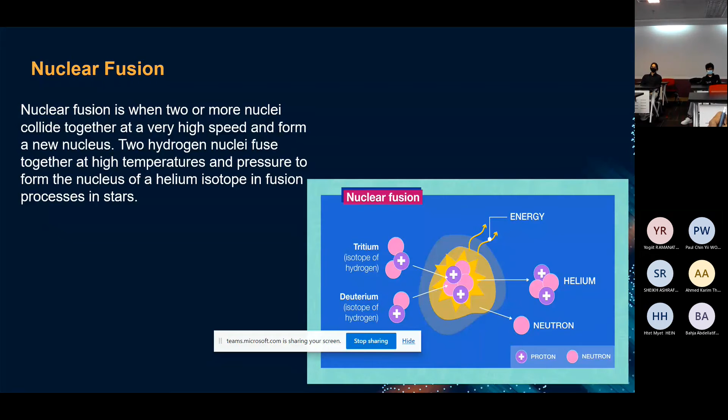Any other question anybody has for nuclear? You're shaking hands, so you have to ask a question. Oh, I thought you said yes. I thought that was a yes. So ask a question. See, you didn't listen. I know that you didn't listen.

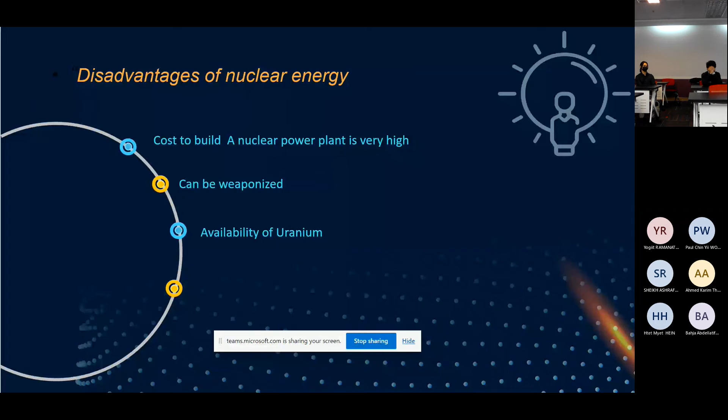Okay, so my question is, how do you prepare the nuclear fuel to be suitable to be used in that type of power plant? So the making of nuclear fuel is a very long and complicated process, but basically, the uranium is transported to a fuel fabrication facility.

I think it's then converted into uranium dioxide powder, and then it goes under the process of enrichment, and then another process. Uranium is a powder? Or what form do we find it in nature? It's like a hard rock, sir. So it's probably a hard rock metal, or a metal, or a gas, powder, what? It's probably a metal, sir. So hard, like ceramic material metal. Okay.

Yeah, and then you have to enrich it to uranium oxide. And then? So you have to enrich it to uranium oxide, and then it goes under a further complicated process and turns into nuclear pellets, which are then used as fuel. Oh okay, so that's it. You have to just prepare it to uranium oxide and then pellets, and then it can produce the energy. And not so that's a whole other process. It's a very complicated process. I only read the gist of it, and I'm telling you what I understood from the process.

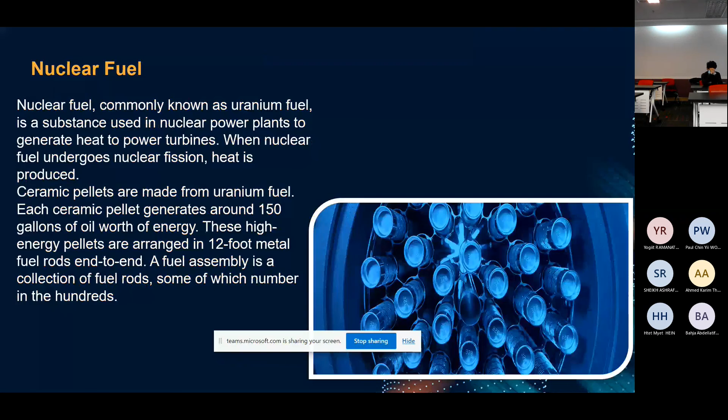That's good. So, question to Paul. Hello, you listening, Paul? Yes, sir. Okay, so for the production of nuclear energy, did you talk about the disadvantages, right? Sir, I talked about the disadvantages, sir. Okay, so my question to Paul, which part did you present? Okay, nuclear fission, the reaction, right?